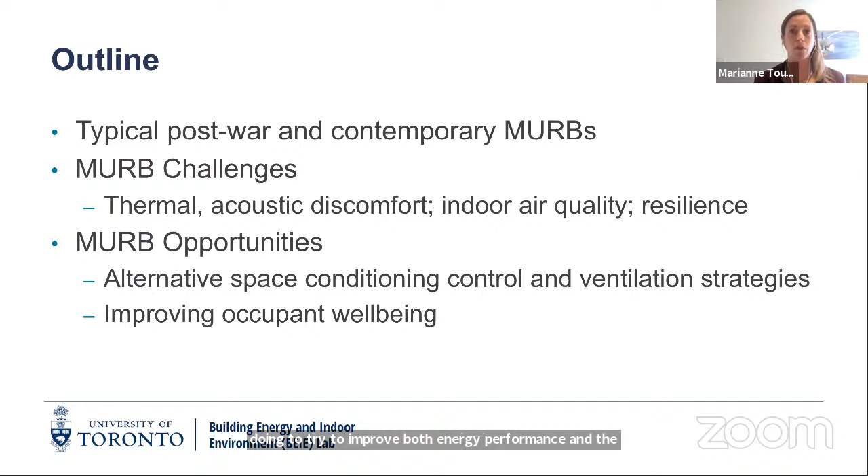I'm not sure if you can see my mouse here, but the building envelope is what encloses our buildings, so our windows, walls, and roofs. The HVAC system is what provides heating, ventilating, and air conditioning to that enclosure. And then the occupants are why we're doing all of this. Buildings are for people, and if it wasn't for them, then we wouldn't have to worry about all of this. But all of these different components interact with one another quite significantly to impact performance. And so that's why we really try to keep all of these elements in mind throughout our research.

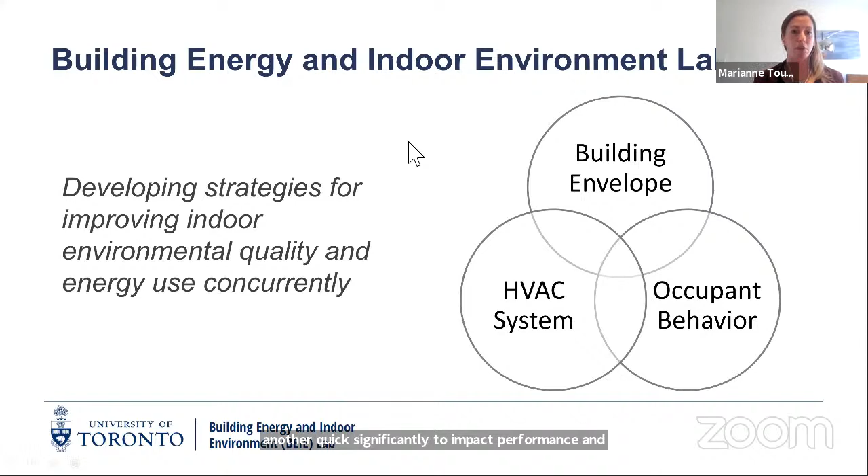And we use lots of different approaches to our work. So initially, when I started out doing my PhD work, I was focusing mainly on energy submetering, and a little bit of indoor environmental quality monitoring, things like temperature, relative humidity, understanding when and how people are opening windows and doors and things like that. But we're starting to move more into engaging residents in our work. So through surveys and interviews and a technique called photo voice, which I'll talk a little bit about as well.

And then once we've collected all of that field data, we typically build calibrated models and then use those models to test out different retrofit approaches before we go out into the real building and start making these changes.

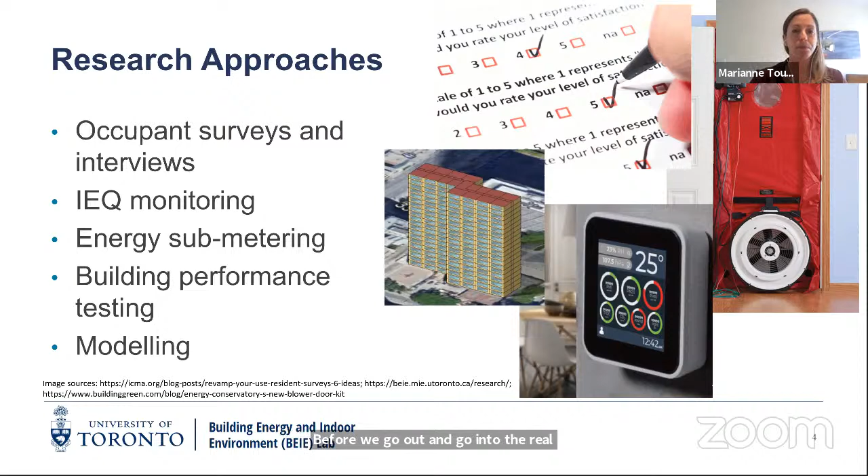So why MURBs? I've touched a little bit on my draw to tower renewal, but multi-unit residential buildings more generally, I just find are such an interesting building type. They kind of fall between the cracks: they're not quite commercial buildings, but they're not quite what we would normally think of as residential buildings. And they experience a lot of issues that are quite unique to a multifamily context. So we're dealing with all of the challenges that we have with respect to high-rise buildings.

So challenges controlling airflow, delivering ventilation adequately throughout the building, which we'll talk a little bit more about. But unlike commercial buildings, these are people's homes. And they all choose to use those homes in different ways. They open windows at different times, they cook, they turn on fans, they use auxiliary heating and cooling equipment. So unlike commercial buildings, which are relatively tightly controlled, these buildings are not. And so they have to be quite adaptable and resilient to operating under this wide range of conditions.

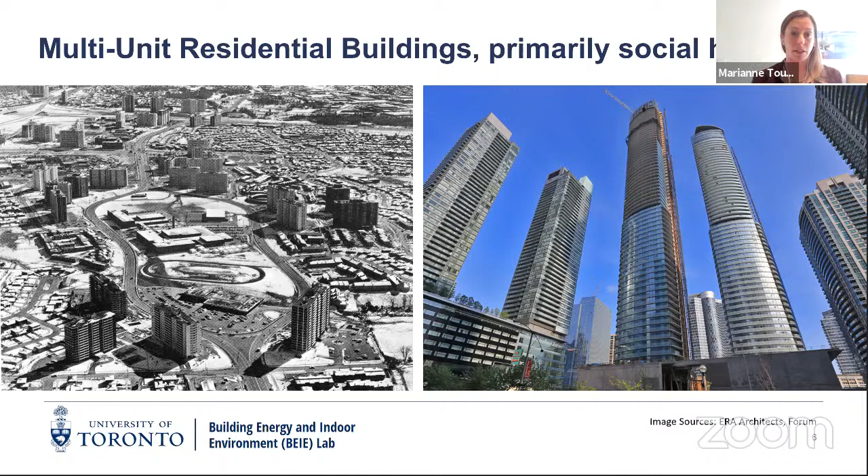So for those reasons, most of my work is in this sector, and I'm primarily interested in social housing because I think that's where some of the biggest challenges are. There's a lot of deferred maintenance already in these buildings, and so trying to go above and beyond just keeping things running is challenging, and so we need to think about low-cost ways of improving energy performance and resilience to climate change as we move forward.

So just briefly, a little bit about MURBs in terms of their significance and the role that they play in the residential building stock. Residential buildings, including single family homes, make up about 17% of our national energy use and are responsible for about 13% of our GHG emissions. But when we think about the number of lives that these buildings touch, it's actually fairly significant. MURBs currently house just over a third of Canadians, and even more in cities like Toronto, upwards of about half. And they're growing. This is the fastest growing form of housing in the country. And so it's something that we're going to need to start paying more attention to in the coming years.

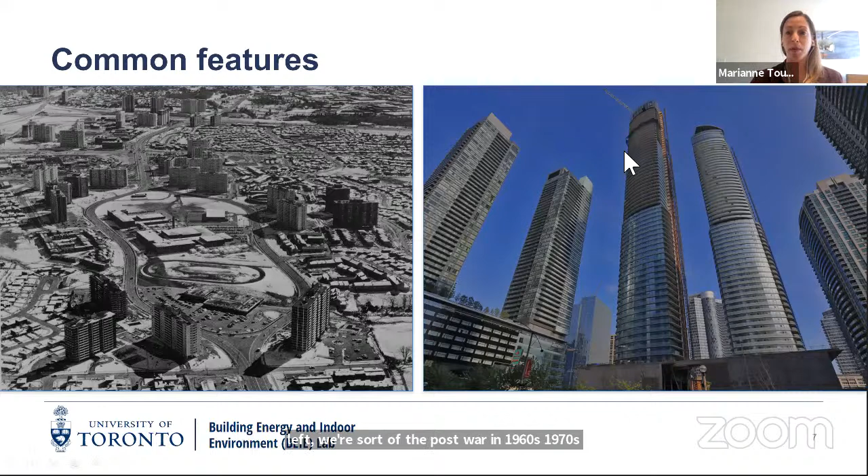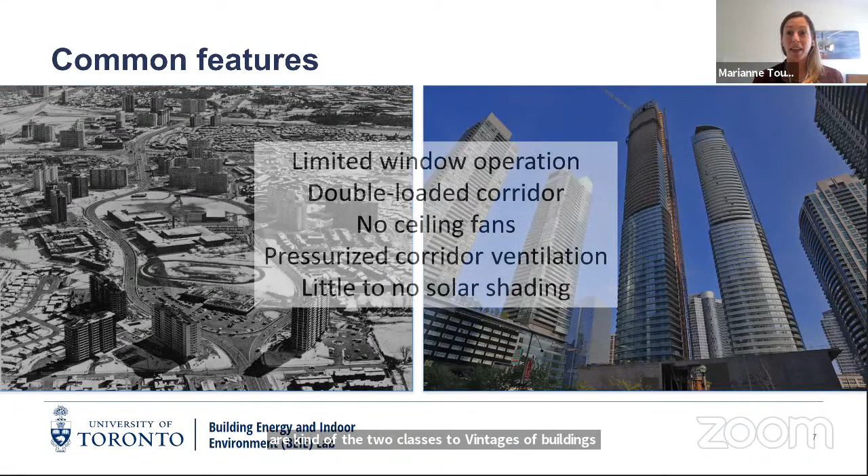So some of the common features that we see across both building types: believe it or not, the buildings on the left were sort of the post-war 1960s, 1970s. Buildings on the right, we've seen a boom recently in the last 2 decades. So those are kind of the two vintages of buildings that we tend to work with. But we haven't really learned that much over the last few decades. We're still seeing a lot of the same approaches to design for lots of reasonable reasons, but they sort of limit what we can do in these buildings.

So for safety reasons, we generally have very limited window operation, typically no more than about 4 inches. We have what we call double loaded corridors, so you have suites located on either side of a corridor, so a typical suite will only face one direction. And then we typically have fairly low ceiling to floor height, so we don't have things like ceiling fans. And so these 3 features really limit the ability to naturally ventilate and cool these buildings overnight in the summer months.

We also tend to see a very common ventilation system in this building type called a pressurized corridor ventilation system, which essentially takes outdoor air, dumps it into the common corridor spaces and tries to positively pressurize it. So we're blowing it up like a balloon and basically relying on these little slots underneath the door for that ventilation air to make its way into the suite. We're going to come back to that, so just remember that one.

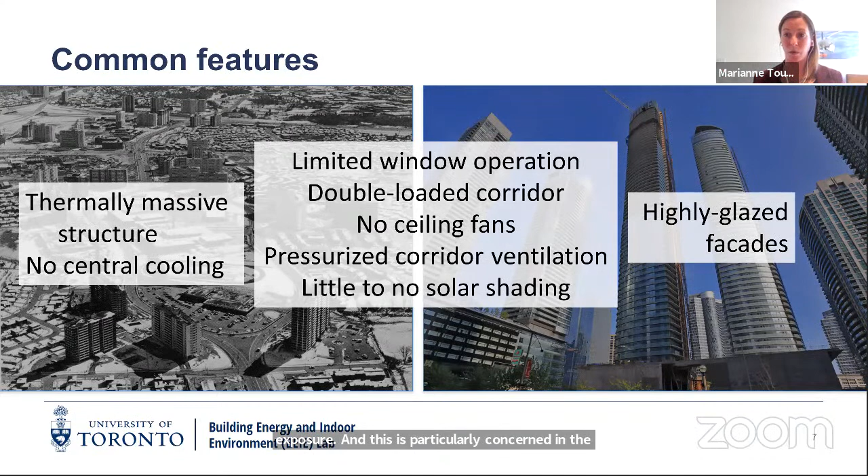And then little to no exterior solar shading. These are tall buildings, so they tend to have a fair amount of solar exposure. And this is particularly a concern in the newer buildings where we've got really highly glazed facades, typically floor to ceiling, wall to wall windows. And on the post-war side, like both of these building types, quite thermally massive structure, which is important when we think about nighttime cooling during extreme heat events. And these buildings typically have no central cooling, so they typically rely on those little window units.

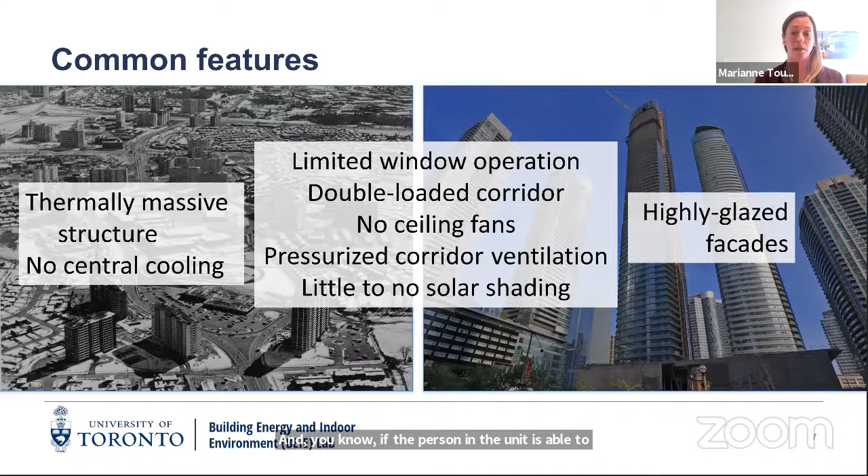If the person in the unit is able to afford to install that, great. But that's not something that's universally available to people in these buildings. So as a result of all of these features, there are a lot of common challenges between these different buildings.

So we tend to see high energy use intensity, significant indoor environmental quality issues related to thermal discomfort, olfactory discomfort, acoustic discomfort. And then we also need to consider, again, in light of a changing climate and more severe weather events, which could lead to power outages, some of the challenges that we're going to face with respect to mobility and access to water if we need to shelter in place for longer than a few hours.

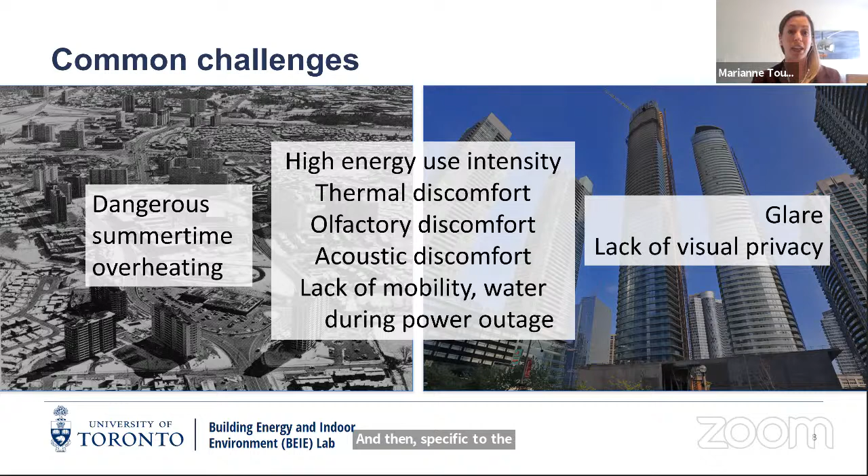And then, specific to the particular building type, we're starting to see pretty dangerous summertime overheating levels in these post-war buildings. And then we have visual comfort issues as well in glare in these high-rise buildings.

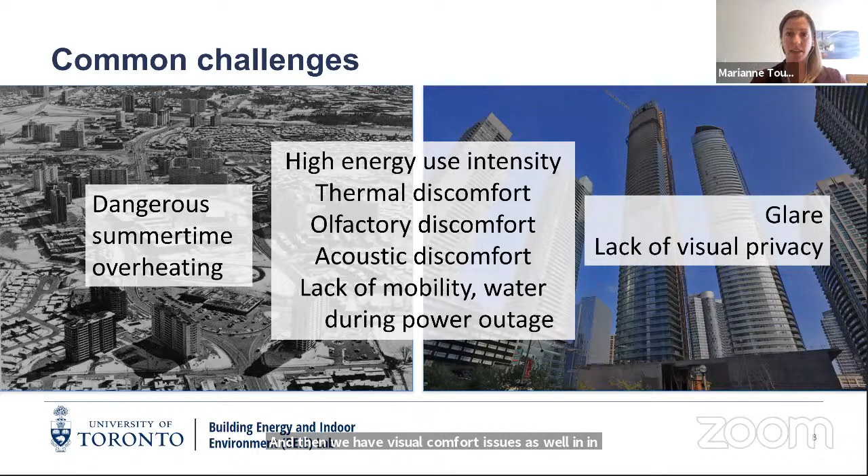So now that we have a sense for the features that sort of link these two groups, but also separate them, I just want to take you through two different studies, actually three different studies, one focused on the post-war building set and another focused on newer buildings. And we'll just sort of look at what we uncovered, basically the current conditions that we're dealing with in these buildings.

So this was a study that I started on actually when I was at the Atmospheric Fund before I joined U of T, but thankfully was sort of looped back in. One of my collaborators was at U of T, so I was able to rejoin the team when I came back. And this was a study that was undertaken because a social housing provider was undertaking fairly significant energy retrofits, and they wanted to understand what implications these energy retrofits would have for the residents.

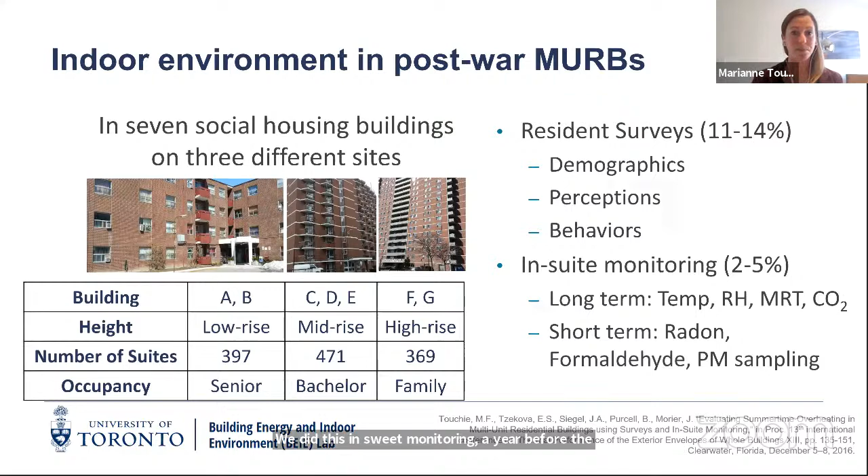And so we went in and undertook a fairly significant in-suite monitoring campaign and accompanied that with resident surveys before and after the retrofit. So we did this in-suite monitoring a year before the retrofit, during the retrofit, and then a year after that. And so we just collected a whole bunch of different data, but I just want to give you sort of a high level overview of where things are at.

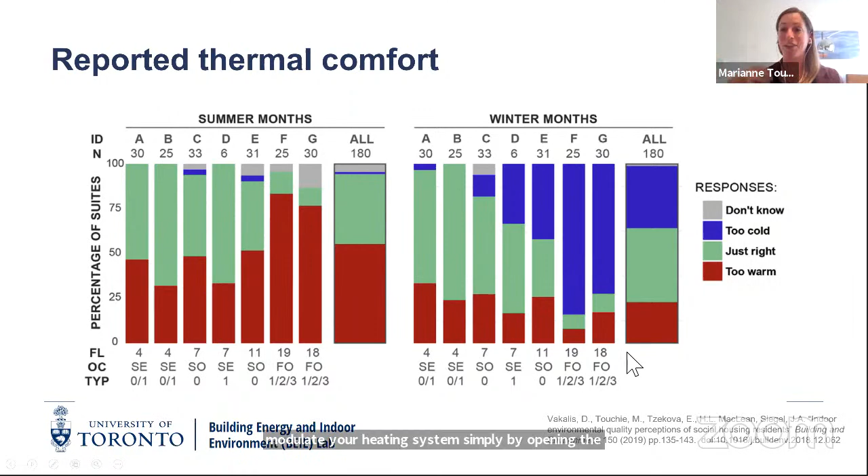And interestingly, in the winter months, we were actually seeing a combination: some buildings, the high-rise buildings, were experiencing significant underheating, so cold thermal discomfort. And we were also experiencing not an insignificant amount of overheating. So this might be signaling heating systems that don't have in-suite control, which is very common in these buildings. And so residents tend to modulate their heating system simply by opening the window, which I hope you can appreciate is not the greatest for energy efficiency.

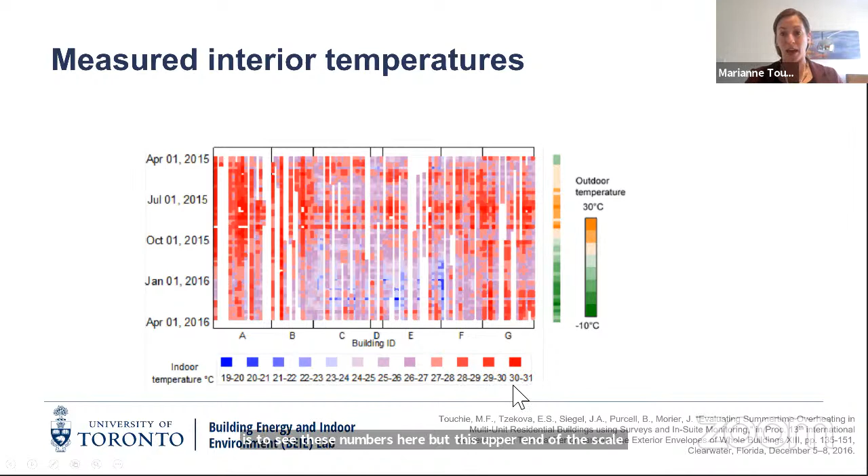And so that's sort of looking at things from the residents' perspective. But when we actually looked at the monitoring data, it was quite shocking to see the really extreme indoor temperatures that we were seeing. I don't know how easy it is to see these numbers here, but this upper end of the scale sort of goes up to the high 20s, low 30 degrees Celsius.

But because of the thermal mass in these buildings, the temperatures really don't decrease in a measurable way at all. So you can imagine how much heat actually builds up over the course of a multi-day extreme heat event, basically making these suites uninhabitable.

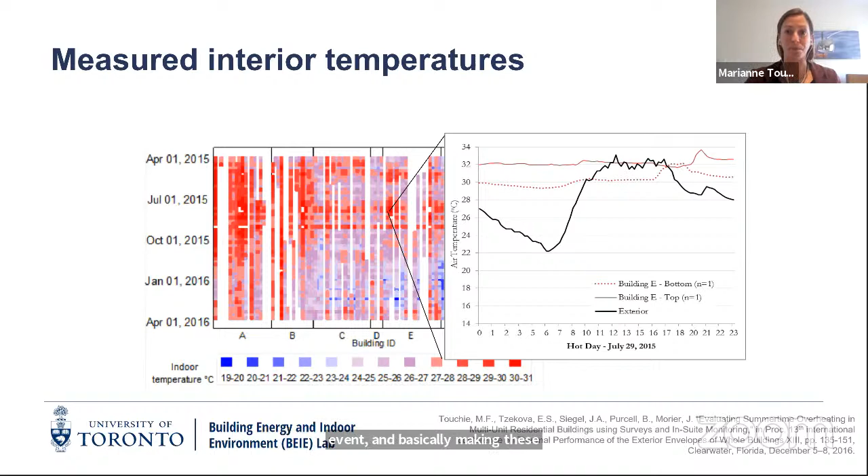So moving on from thermal comfort, we also looked at olfactory discomfort. So what sort of things do you smell in your apartment? It makes sense in a multifamily space. People are doing lots of different things, some things they perhaps shouldn't.

And the result was that we found more than half of people were bothered by this every single day. So imagine being bothered by something like that every day in your home. That is not insignificant. And this is a combination of a variety of different things: smoking in buildings that should otherwise be non-smoking, your own cooking, from your neighbors, and outdoor sources as well.

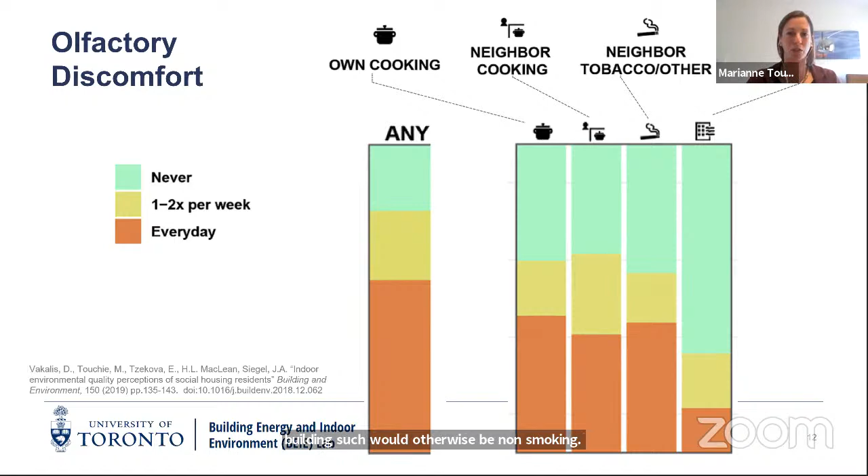So let's shift gears. We know there are some problems in the post-war sector, but I also wanted to highlight that we're still seeing a lot of these challenges in newer buildings as well. And so as part of a larger study that we did on the impact that smart thermostats can have on building energy use, we recruited two fairly new condo towers, both located in downtown Toronto, both with these fairly highly glazed envelopes that I mentioned earlier in the presentation.

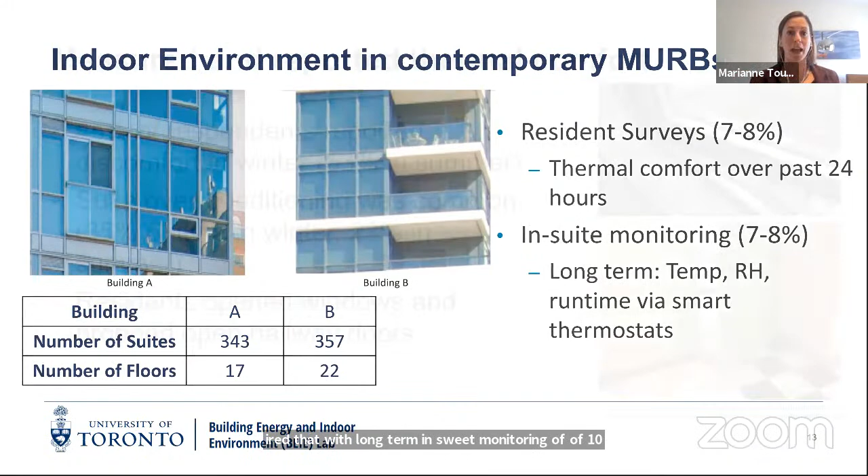And we undertook a similar sort of approach. So we used resident surveys to understand what their perceptions of thermal comfort, among other things, were. And then we paired that with long-term in-suite monitoring of temperature and a number of other indoor parameters. And what we found, frankly, was not that different.

So about half of the residents are uncomfortable in the winter and uncomfortable in the summer from a thermal comfort perspective. And the difference here is that these buildings have central cooling. They have in-suite heating and cooling controls, and they were still not able to achieve thermal comfort for the residents.

We also found that over-conditioning was common. So what I mean by this is that central ventilation air that I mentioned that's driven into the common corridor spaces was over-conditioned to the extent that it was conditioning the suites, so providing heating and cooling into the suites. And for long periods of time, the thermostats in the suites wouldn't even turn on. So that's a signal of, okay, we've got some excessive energy use here, and so we can try to reduce energy use that way.

The other interesting thing that we gleaned from the surveys was that residents would prop their windows open, not necessarily surprising, but they also propped open their hallway doors. And so if you can imagine when you're trying to control where air is moving, if you all of a sudden open up all of these interior and exterior partitions that were originally intended to be closed, it makes it a lot harder to operate these central systems. So it's, I guess, in that way, not surprising that we're seeing such serious performance issues.

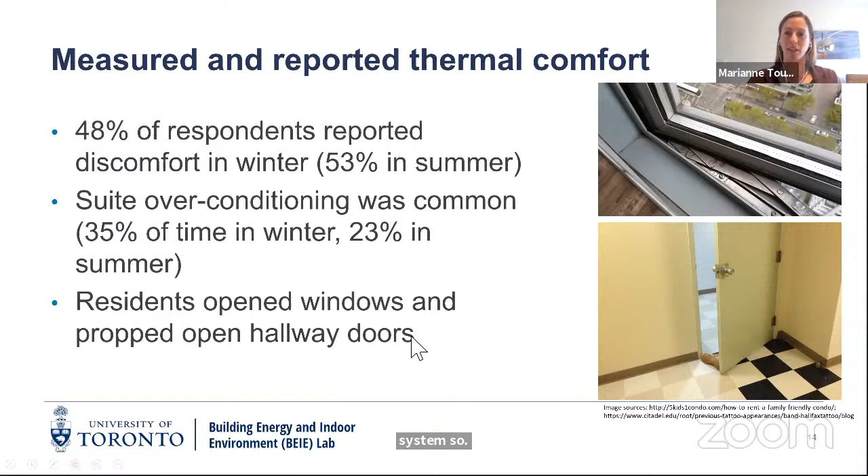And then stepping into a different dimension, so we talked a little bit about thermal comfort and ventilation. Another major challenge, as I think everyone can probably appreciate when you're living next to a bunch of other people, is acoustic comfort. And so we undertook a fairly large study involving surveying people in over 30 MURBs, over 200 respondents, to ask them how they felt about the noise that they heard in these buildings.

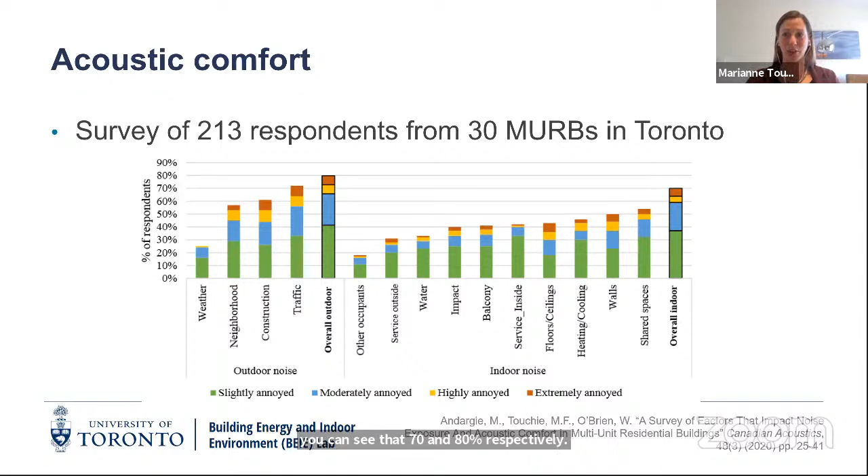And in this plot that you see here, I'll just draw your attention to the bolded columns here, one looking at overall outdoor noise, and on the right here, looking at overall indoor noise. And here, green does not mean good. Green is still annoyed. So green is slightly annoyed, and we progress up to extremely annoyed in red. And so you can see that 70 and 80% respectively of residents are annoyed with indoor and outdoor noise. So this is a major problem in these buildings.

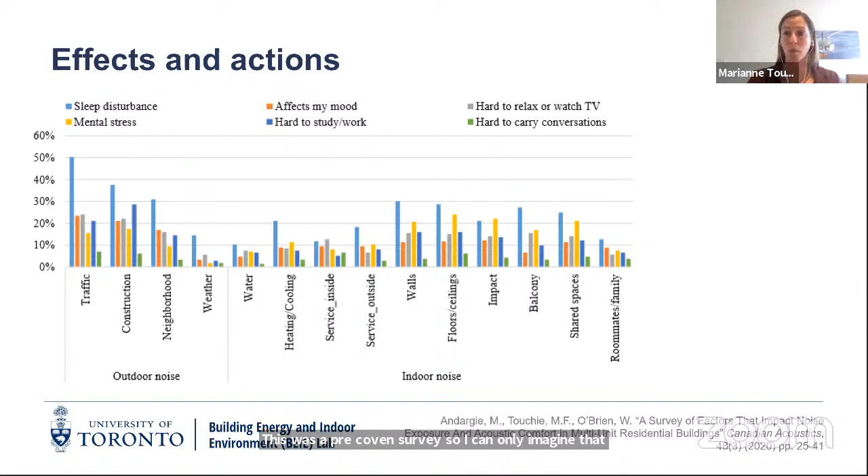And then the impact that this has on residents, everything from sleep disturbance to affecting their mood to making it harder to work and study. This was a pre-COVID survey, so I can only imagine that these effects have increased with the widespread work from home orders over the last 18 months.

And then what's interesting too is to look at how people respond to this. So some of the things might actually make it easier to control airflow, these first two actions, but some of them are quite interesting. So some people actually create their own noise to mask other people's noise, which actually makes the whole problem worse.

The other one I just wanted to highlight here was some people weather strip their suite door. Now, if you remember back to our pressurized corridor system, where is our ventilation air coming from? It's all coming from the corridor by that suite. So in order to deal with an acoustic comfort issue, people are essentially cutting off their access to outdoor air.

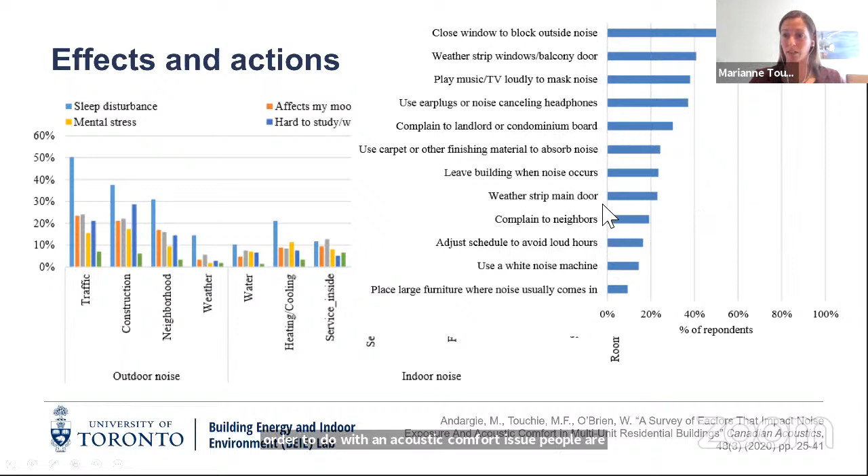And so I mentioned that because I just want to highlight that all of these things are working together as a system. You can't just deal with one. Everything really affects everything else. So now that we have a sense of where things are at, let's look ahead. So what challenges are these buildings facing?

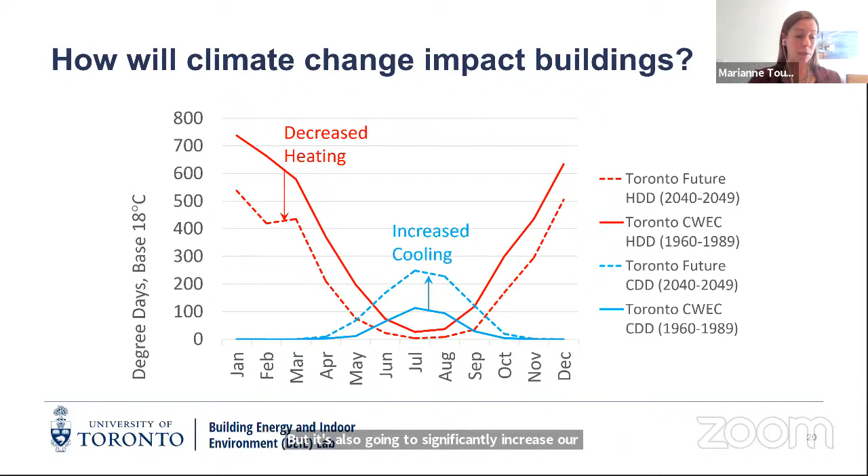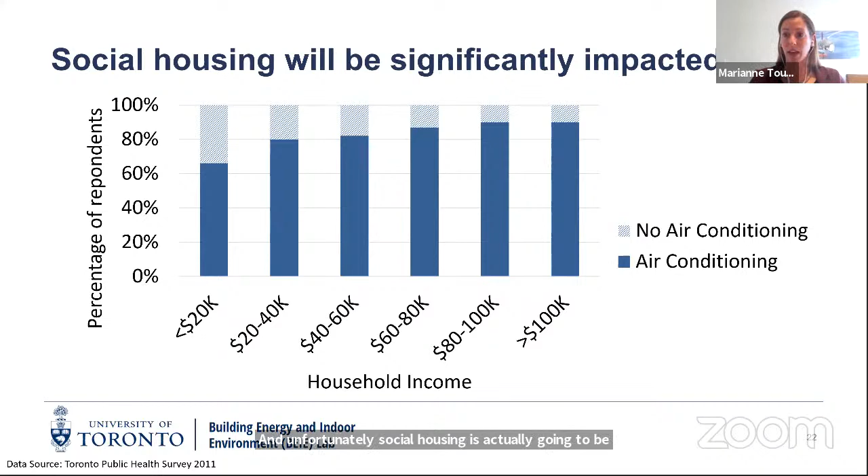I think we're all aware that we're going to be seeing increased maximum temperatures and extended heat waves. And the impact that that's going to have on our built environment is positively, it's going to decrease our heating load, which is good, but it's also going to significantly increase our cooling load to the point where these buildings will require cooling beyond the capacity that they were designed to provide. And unfortunately, social housing is actually going to be most significantly impacted because of that lack of access to active cooling.

And as we start to undertake what is going to be a fairly dramatic transformation in the built environment, we need to keep in the back of our mind that this is not just reducing building energy consumption to reduce our GHG emissions to mitigate the effects of climate change, we're also going to need to start adapting to this changing climate. And we need to keep both of those pieces in mind as we approach changes to the buildings.

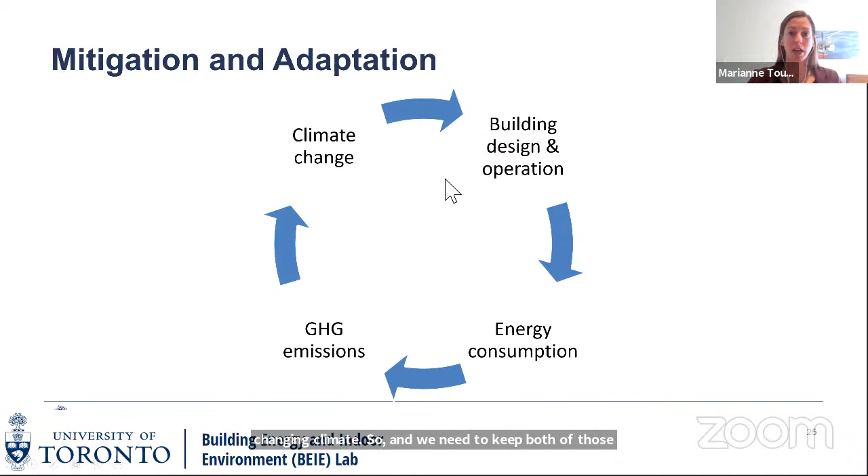So the short story is that we need some fairly deep retrofits right now. We should have been doing this for quite some time, so there's no time to delay. And these need to be reducing both operational and embodied emissions, but at the same time adapting to a changing climate. And so what I'm proposing here is we're going to be investing millions and millions of dollars per building, billions of dollars across the country in this. So let's take this opportunity to think more holistically about building performance and address all of the other issues that we've spoken about in the last few minutes.

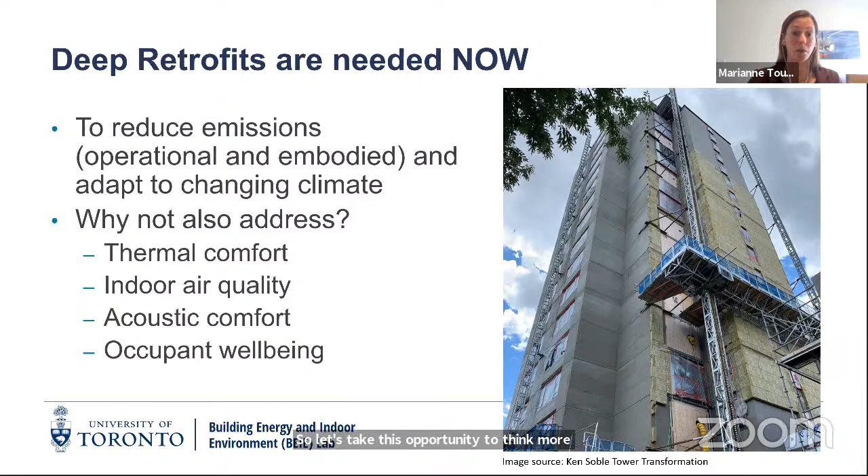So one project, this post-war housing project that I mentioned at the outset of this presentation, the PhD student who was working on this project interestingly undertook a life cycle analysis, because I briefly mentioned that embodied carbon piece. We need to be cognizant as we reduce our operating energy use. The embodied carbon in our buildings and the decisions that we make with respect to retrofits is going to become a bigger piece of our carbon pie. And so she undertook this life cycle analysis.

Now, this was primarily mechanically driven, just replacing major mechanical components. And so the life cycle carbon savings as a result of these improvements is really a no-brainer. The embodied carbon was virtually nothing. But when we start to do things like replacing windows and overcladding, meaning basically putting a coat on the building, adding this exterior insulation, those are going to have far more significant impacts on embodied carbon. So we need to keep that in mind as well.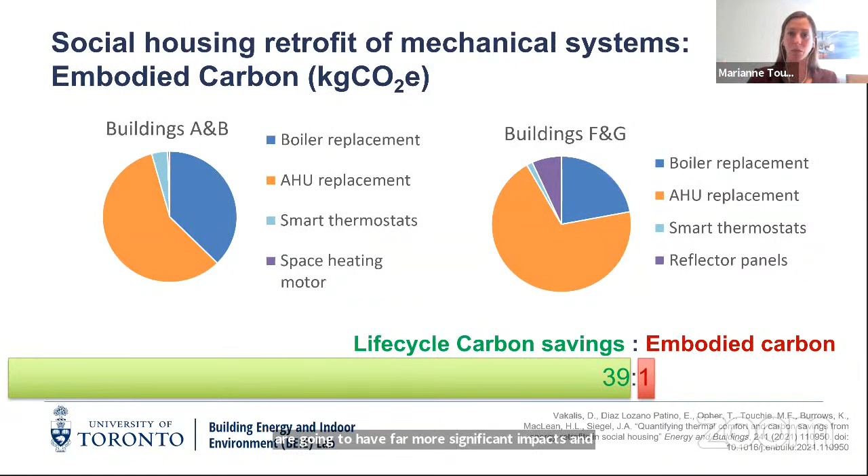But what was really interesting was the data I showed you before was the pre-retrofit data. And what we tried to do was compare pre and post-retrofit. Did these retrofits actually have a meaningful impact on the residents? And the answer was no. There really wasn't a significant and consistent change between these buildings. Some buildings saw a slight improvement, some buildings saw virtually no change. Now, to be fair, there were no explicit thermal comfort goals in this project. This was purely to reduce GHG emissions of the building.

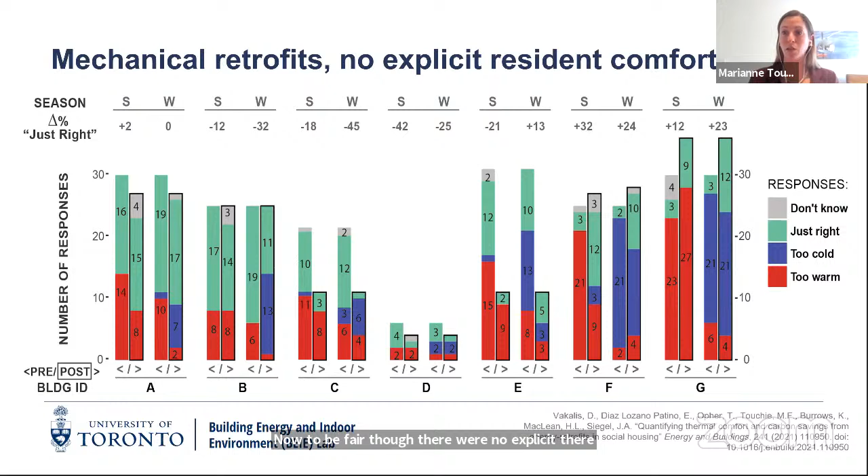But what that tells us is that we need to build these goals right into our retrofit projects, because what we saw across 7 buildings, very similar retrofits didn't necessarily yield the same result in different buildings. And it's really difficult to predict how occupants are going to react to these different interior conditions. So we definitely need more research on that piece, which is something that our group is actively working on. Then that these mechanical retrofits have low embodied carbon, but we've already talked about that, so that's okay.

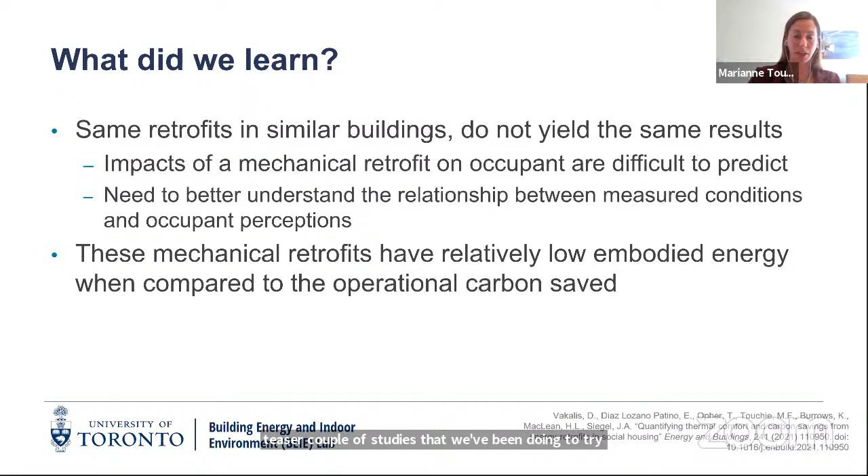So what I'd like to do now that we've sort of looked at the challenges that these buildings face and what's going to be happening in the future, I'm just going to sort of present you with a bit of a teaser, a couple of studies that we've been doing to try and get at this piece of energy and improving comfort and well-being and improving the experience for the residents.

So in those newer buildings that I mentioned before, these buildings have only just been completed and occupied. So I think they were both 2017 or 2018, I can't remember.

I apologize, both my kids are home awaiting COVID tests, so there's going to be a little bit of screaming in the background. They've just come home.

So with these buildings, what we did was replace the non-programmable thermostats with smart thermostats to see if we could alter the control algorithm to try to reduce energy use without having any noticeable impact on thermal comfort. That was really the goal of the study.

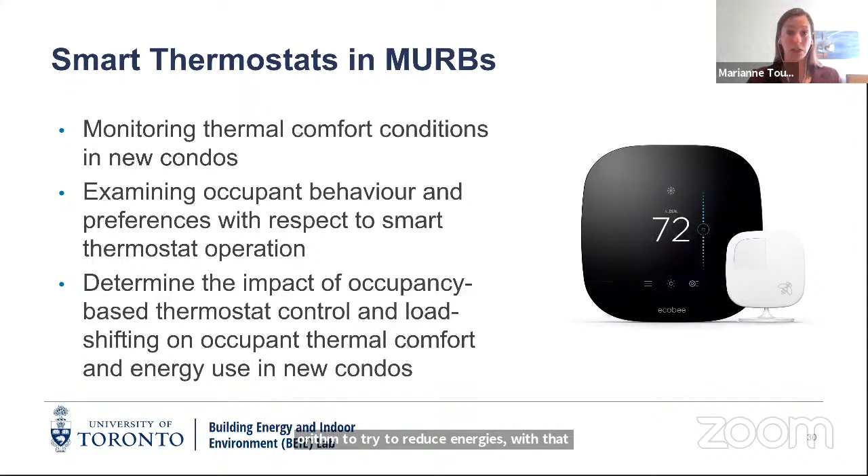And so we were able to glean a whole bunch of different things from the study, one of which was smart thermostats tended to be programmed at a much higher rate than a standard programmable thermostat. We are typically not very good. On average, only about 30% of programmable thermostats are actually programmed. Here we saw an increase up to 83%. So that's already a great step in terms of trying to reduce energy use.

And then we also found that occupancy-based control, so what I mean by that is having an occupancy sensor that looks to see when you're home and when you're not home. And when you're not home, it will reduce or increase your set point temperature in order to save energy. So that was quite a useful function as well, and could reduce almost 80% of avoidable demand compared to as if you were just running a schedule. So it allows these systems to adapt to your actual occupancy schedule.

The other interesting piece was the diagnostic capabilities of these connected thermostats. We were actually using the data to identify other problems, such as the overconditioning that I mentioned. So even though this is a suite-based technology, it allowed us to detect issues that were happening with the central system that could be another means of both improving occupant thermal comfort and reducing building energy use.

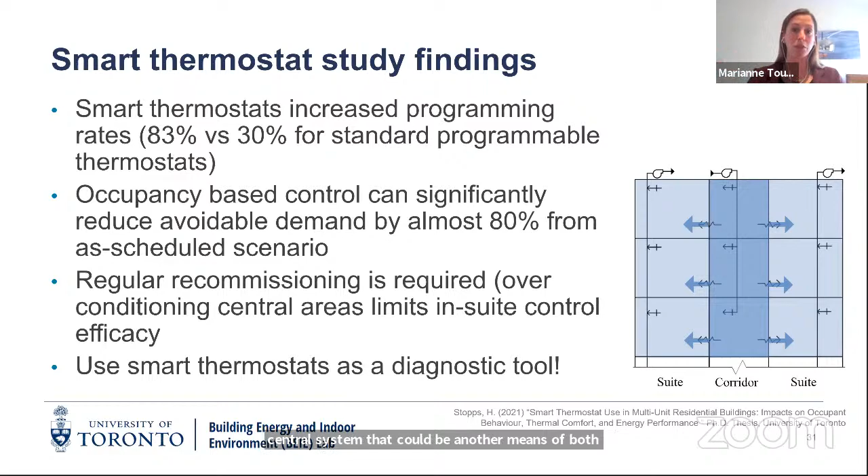Flipping back over to our post-war buildings, some of you might be familiar with how these buildings are operated, but some of you might be shocked to hear that there are often 1 or 2 thermostats for the entire building. And so there's really no in-suite control in a lot of these buildings. As I mentioned, people simply modulate the temperature in their suite by opening and closing the window in the middle of the winter.

And so we were thinking, okay, is there a way to, rather than retrofit every single suite with a thermostatic valve and a thermostat, which is very expensive, can we strategically place valves and use remote temperature sensors to group suites that have similar space heating needs, and then dial just segments of the building down to try to reduce set point temperature and try and reduce the instance of that window operation. So this was a study that we did. It was a simulation-based study, although we are looking at doing a pilot in a building soon.

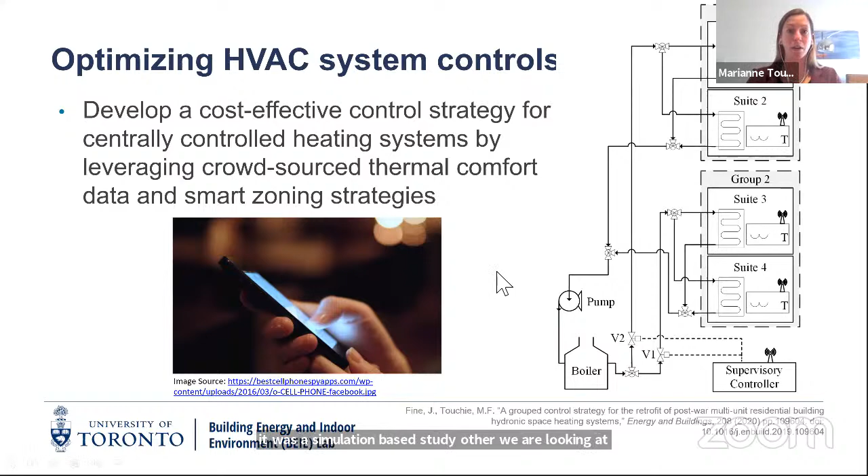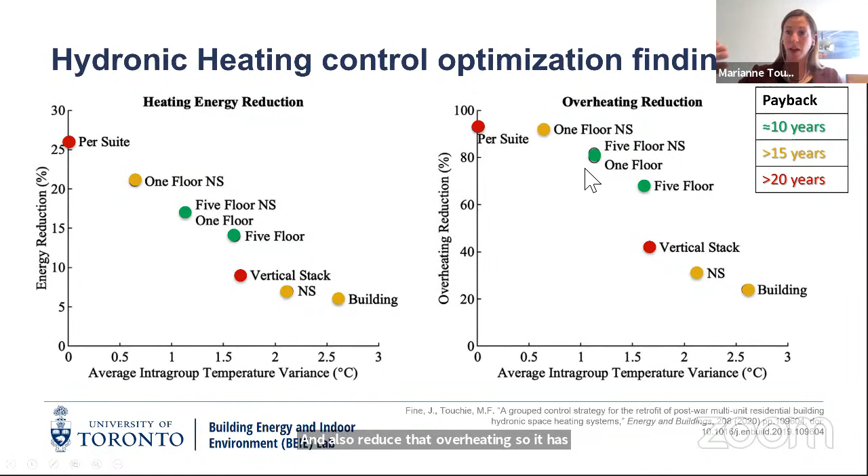So then I've just color-coded these by payback period. Most building owners would balk at anything more than 10 years. So there are some interesting opportunities here that can yield a fairly significant space heating energy savings reduction, these 2 green scenarios here, and also reduce that overheating. So it has that knock-on effect of potentially reducing that window operation as well, which is great. So hopefully we'll see those results bear out in our field trial as well.

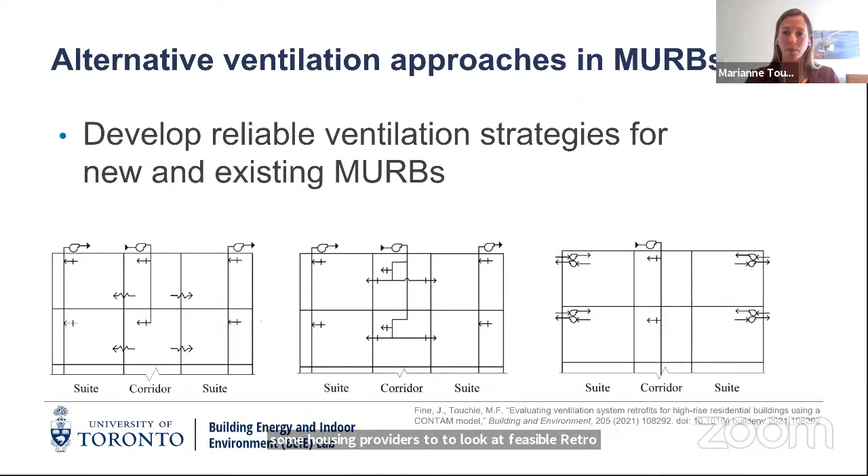And then coming back to these ventilation challenges that I mentioned before. So we've been working with some housing providers to look at feasible retrofit strategies for these systems. And so we did a simulation study to investigate how these different systems might perform.

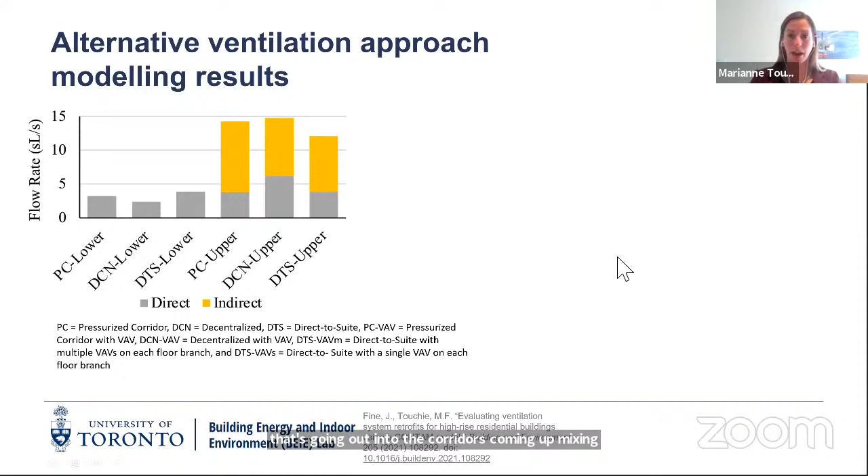And one thing that was really shocking to us, which I guess is kind of explainable as well, is the amount of air in your suite that's actually coming from other residents. So in this plot on the left-hand side, you've got these gray bars, which represent the amount of air that's directly transferred through walls and ceilings and floors. But we also have a fairly significant amount of air that's going out into the corridors, coming up, mixing with other people's air, and then re-entering suites in the upper half of the building. So this is something that, particularly in COVID times, we need to be mindful of and do a better job of controlling where our air goes.

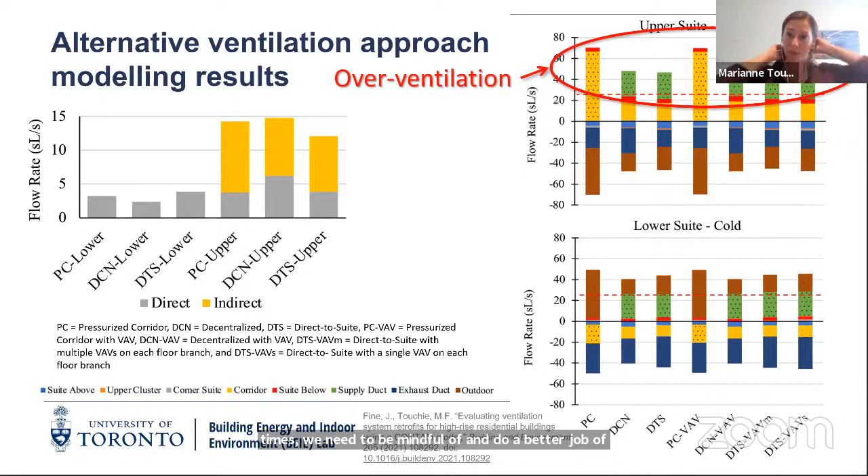And I'm cognizant of the time, so I'm just gonna flip through here.

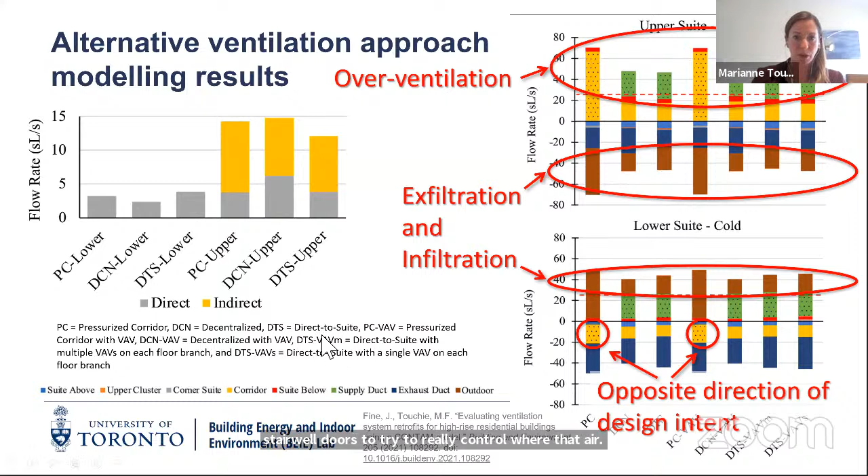Sorry, I guess my main takeaway with this one was there are lots of opportunities to improve how these systems are operated. And one of the things that we found was that it doesn't matter so much what system we choose. We're still seeing a lot of challenges, even in what we would think are the best solutions when you look at a decentralized ventilation system. But what we've turned our attention to now is actually sealing up all of the interzonal partitions, things like elevator doors, suite doors, stairwell doors, to try to really control where that air goes. And so that's what we're working on right now, but lots of potential here. And we're about to undertake a field study on this one as well.

And then the last study I just wanted to mention briefly is we're going in an even broader direction now. So I went from energy use to indoor environmental quality parameters to resident perceptions of comfort. And really all of this feeds into resident well-being. And so with partners from the Faculty of Architecture and School of the Environment, we're undertaking this interdisciplinary study looking at how elements of the built environment can add to or detract from well-being. So as we're approaching these retrofits, are there other things that we can integrate into our retrofit planning in order to improve the well-being of residents?

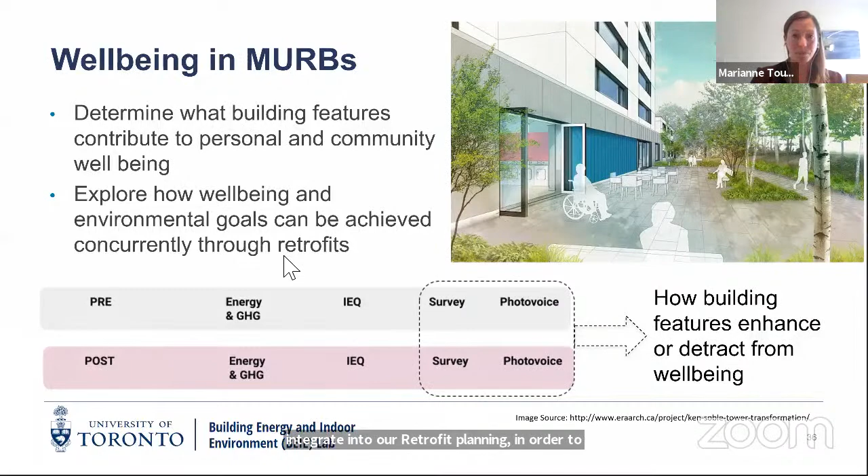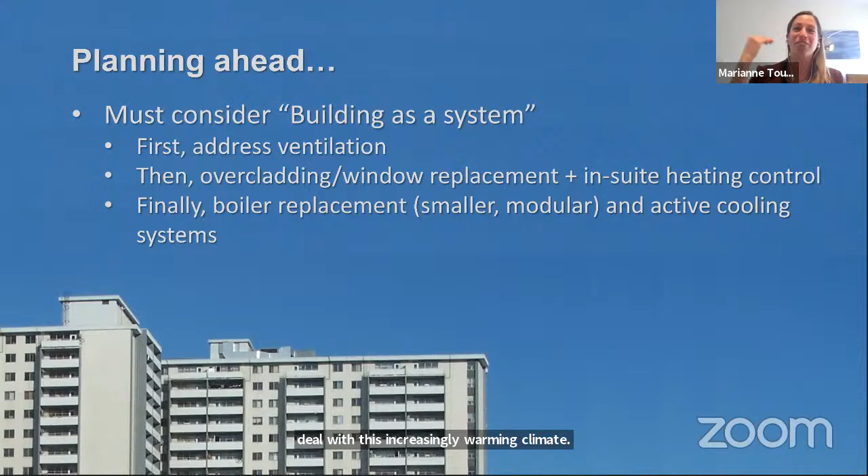So just a few concluding thoughts, and then I think we'll open it up for questions. MURBs are growing. They're the fastest growing source of housing in the country. So they do represent a growing concern because of all of the issues that I mentioned. And on top of dealing with all of those performance issues, we absolutely must be reducing their GHG emissions significantly and adapting these MURBs to deal with this increasingly warming climate. But it's not as easy as just replacing single components. We really need to think about these buildings as a system and how all of these different components work together to influence the experience of the residents.

And it's something that we're working on with some industry partners: to go beyond simply having GHG emission reduction targets, and actually establishing specific comfort and well-being goals and building those right into our retrofit performance assessment frameworks.